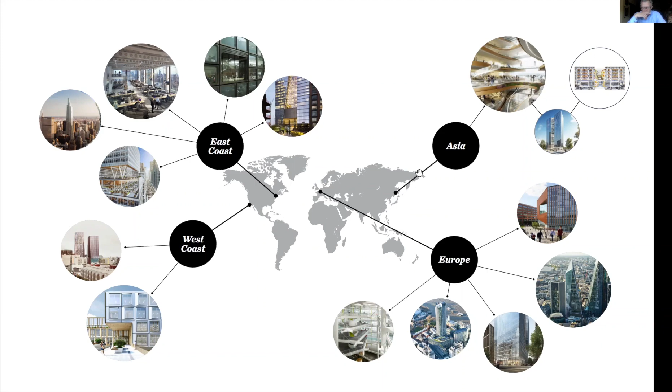Just very briefly, KPF has London and New York design offices, and we work very closely together. In terms of workplace, we are from London, working mainly in the UK, but also on the continent and in Asia. Our New York colleagues have an office also in San Francisco, so we cover tech people, Facebook, Google, etc., on the West Coast, the southern states, and tech companies and other companies in Asia. So we've got a really good sense of very rapidly changing trends at the moment.

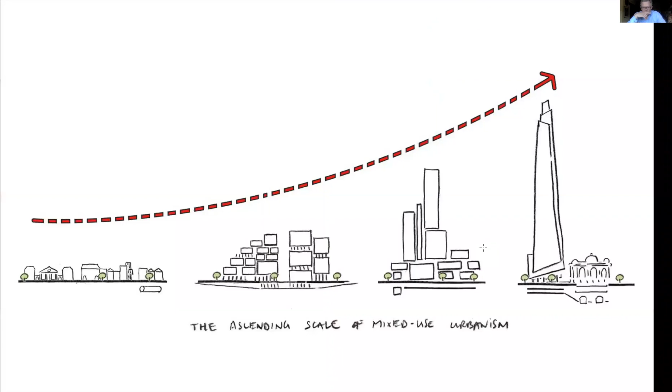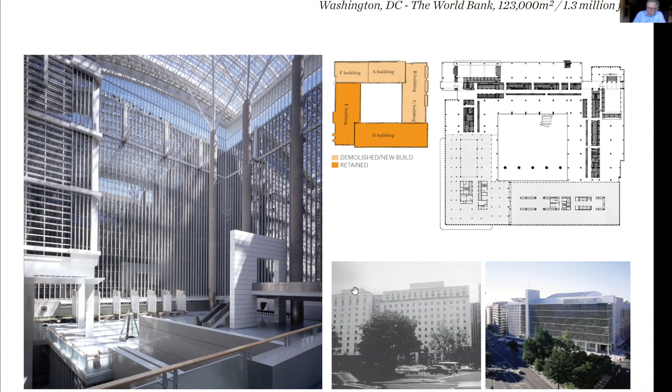To illustrate that, this is the World Bank in DC, which we did in the early 90s. We were the only architect to present a reuse scheme because in Washington DC there's a fix to the heights. This is very relevant to 81 Newgate Street because it's got quite a tight floor to floor. Through this, we learned all about how if you didn't have enough room for deep ducts horizontally, you made more zones. So from the beginning we knew that if, say, this is probably 3 tenancies, 3 zones, we actually have 6 zones in MEP. So all the horizontal ductwork is minimized and we have more risers. That was a helpful thing to start from the very beginning.

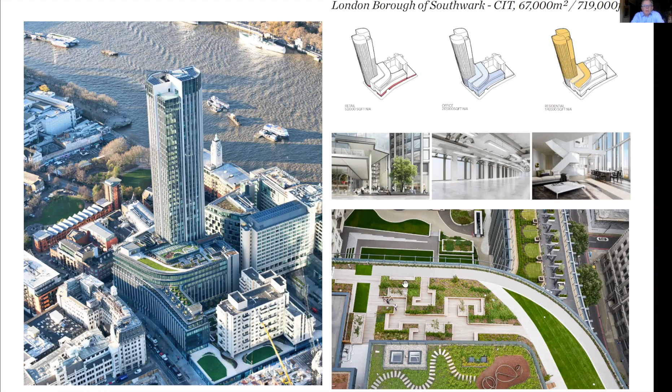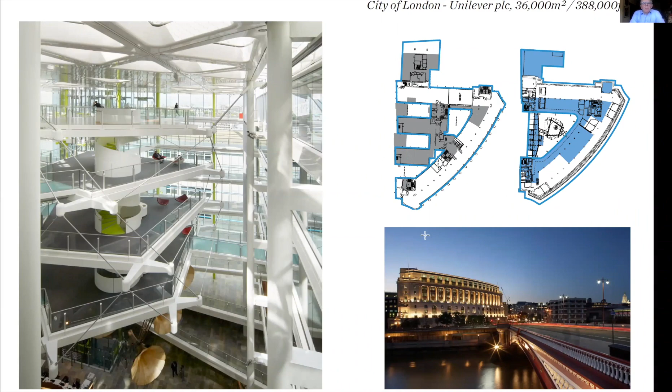In terms of children of the 70s and 80s, we like them a lot. This is South Bank Tower - the frames are extremely well built, and the concrete gets harder over time from when it's finished, so they're very robust buildings fundamentally to use. Unilever again is a kind of transformation where we try to reinvent what people might have done if they'd had more freedom at the time. And again, we're trying to make 81 Newgate Street a better version of what it actually was. So we quite like that era.

Just so you know, in Manhattan there are a huge number of transformation projects occurring at the moment, and we're doing a lot of them.

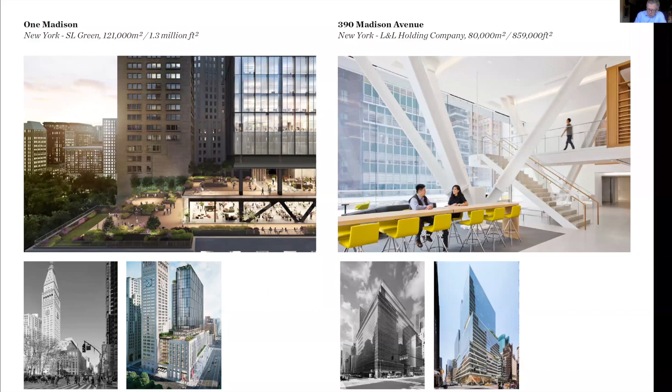Huge projects. The two biggest components, other than the obvious new systems and envelope, are interesting structural interventions to make buildings that typically have quite a tight floor-to-floor height have voids and volumes and special spaces, which we did at 81 Newgate Street. Key also is how you reposition the lobbies and the interaction of buildings that didn't have active ground floors with their urban block.

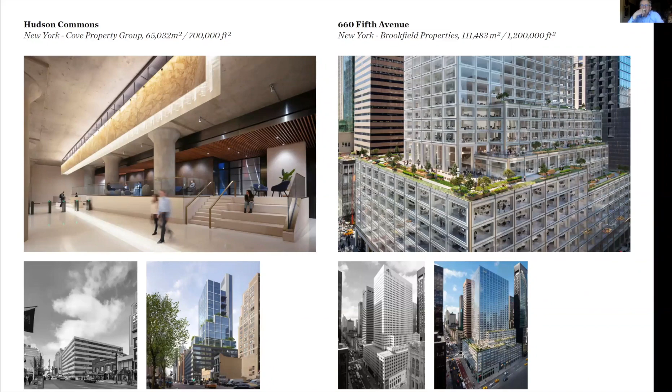On the right hand, 660 Fifth Avenue. There we discovered there's a very fragile slab edge, so we had to span column to column. Taking the aluminium out of the curtain wall system was hugely useful for the performance of the glazing, so we've got glass that's shaded, while cutting down the aluminium and the weaknesses in the curtain wall system as much as possible, or covering them.

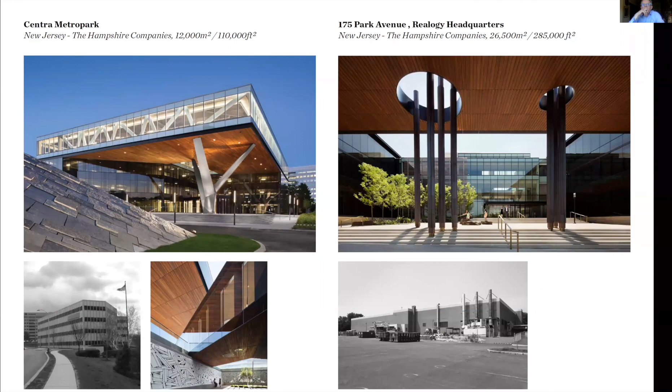Repositioning some of our own buildings as well, key is the lobby, and then a very workmanlike transformation of the buildings. Even in New Jersey, bottom left, a very unpromising start, another child of the 70s, and a shed on the right. So we really enjoy it - for us it's about imagination and coming up with something different.

This is very contextual for LA, but it's again a transformation. It was a shed, and this is now a car museum. Jean always jokes that if you look around at this junction, everything else is the same.

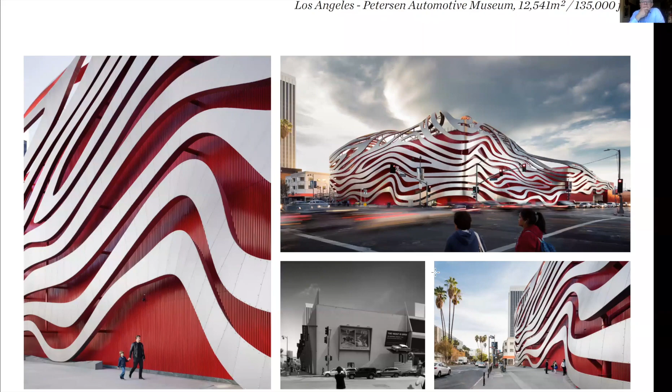We love roof gardens - I did my 5th year dissertation on roof gardens, and we always try to ban the MEP engineers from our roofs.

Thames Court, a little while ago now, was the first KPF project I worked on, but it did introduce us to the St. Paul's grid. There's not a millimetre of space - just a millimetre in this project - between the building and the St. Paul's grid, and that was a useful insight when we started this project.

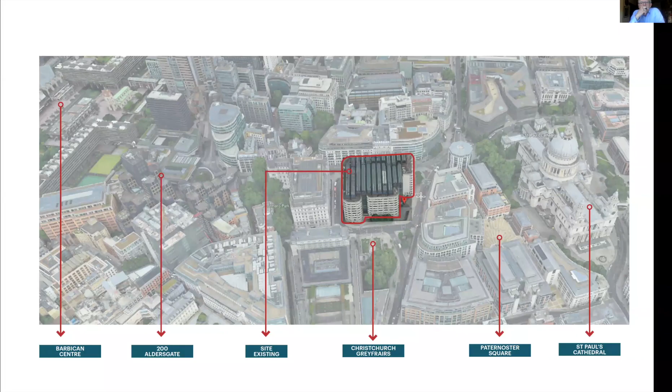So, interesting building - very robustly built, a very big lump. The idea is to really make it more open, internal to exterior, to make terraces, and to completely reduce its overbearing character while making a bigger building.

You can see here that we voluntarily took away some of the existing building. It was built by the PSA and did not comply with St. Paul's heights and grids. From the very beginning, when we were talking to Orion and Pella, we said we have to take some building away here before we can start figuring out what we do next.

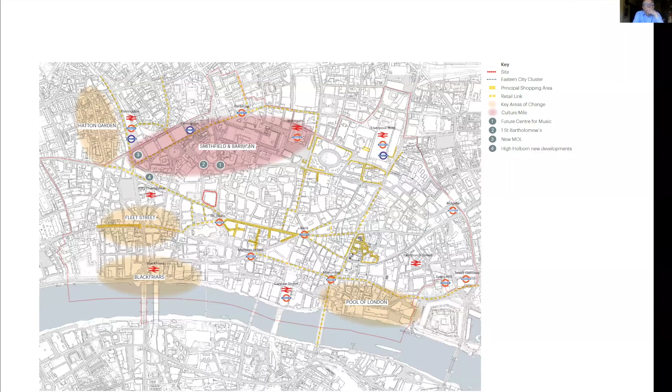That will be a good start also in discussions with the city, and effectively that's what we did. The building is a linchpin where at the moment it's totally closed off on a gyratory, yet it's just close to St. Paul's and to the cultural district, at the end of Cheapside. So the city wanted this building to completely transform too, and it began to get a list of all the things they wanted on the site - and we've been able to do all of those.

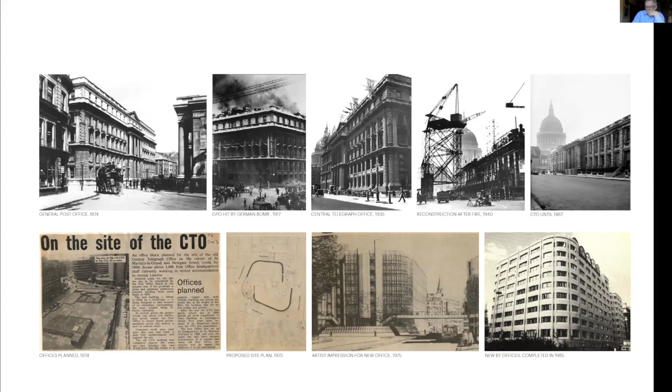So, GPO to BT, a slightly curious building. It had very, very large atriums in the middle, lots of basement space, lots of tunnels underneath it, so we didn't want to do very much in the basements at all. Nascently in the plan, you can see here a combination of atriums, but also slots or gaps to the outside.

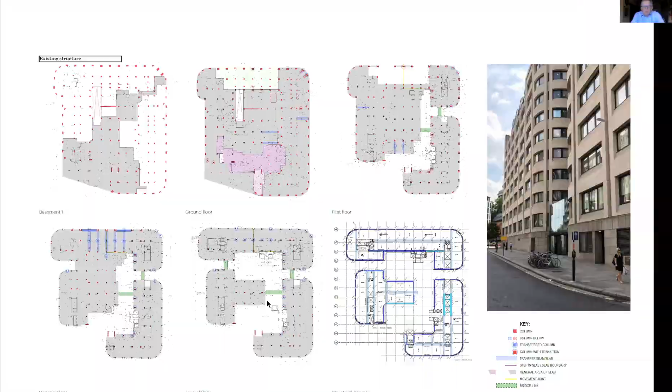Very lean in terms of being quite an efficient building - dispersed cores, lots of columns. So from the beginning we suggested it was a refurbishment. We didn't win the first round of bids on this, and it was when the new-build option fell away that the next set were actually on refurbishments.

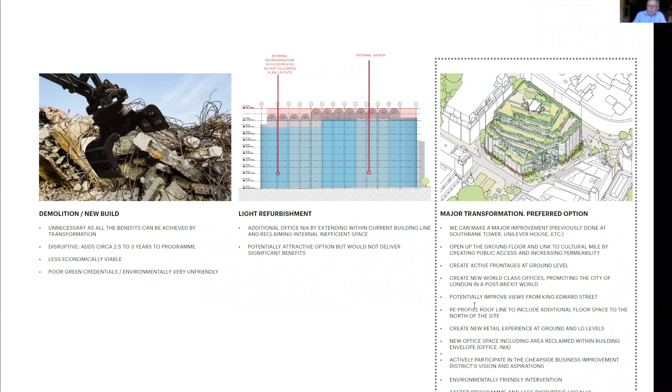We looked at a very basic one, or a transformational refurbishment. You can see from the very beginning, on the right-hand side, that we knew we wanted to take space away to make the building comply more with responding to its setting. Here, bottom right, you can see the St. Paul's grids going across the corner of the building.

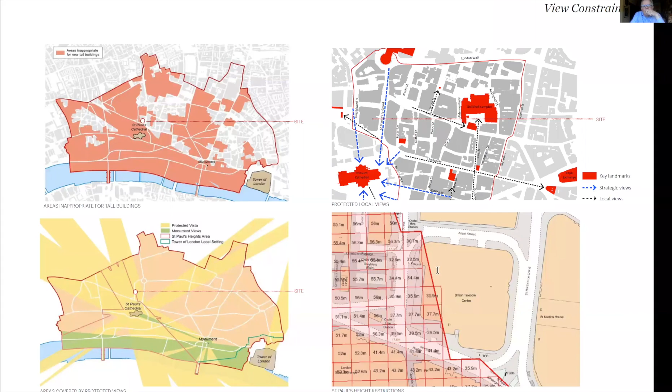Settings of St. Paul's, lots and lots of views - a very large number of view studies, and we do all of the first take of those ourselves. We have a full London model, etc. So the story evolved about how we could add area in some places, take it away in others, but really completely transform the character, the association and the image of the building from this very big, lumpy, quite bunker-like thing to something utterly different.

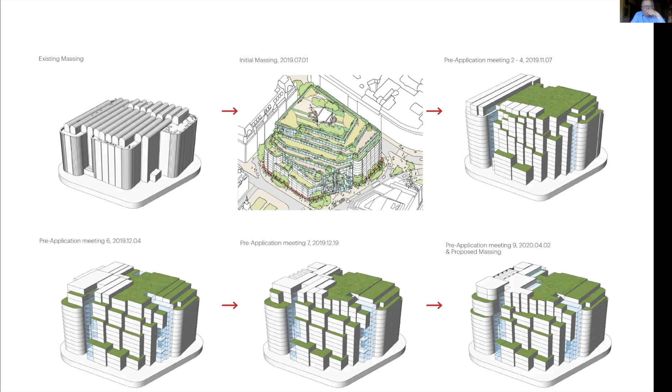And in taking away the western face of the building for views of St. Paul's...

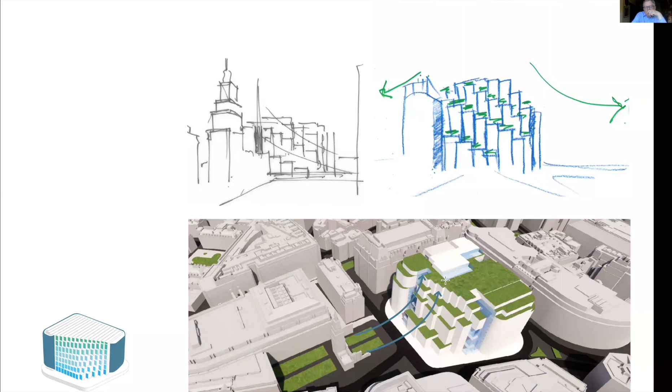St. Paul's allowed us to completely remodel the most visible and important facade in many ways. We began to look at how we could have lower, mid and bigger elements to really change the cliff-like nature of the building, to bring almost a story of the gardens of Christchurch to steps and terraces up our building and to a big roof garden at the top. The taking away of space and the ability to remodel just the front surfaces seemed to be a really good synergy and starting point.

We try and be very analytical, and this goes through a process of where are the cores, where are the holes. We have a few rules we've learned painfully over time, that you can't put new cores where there's current floor slabs - they have to be in the holes that exist at the moment. So we're very, very self-regulating and disciplined. But we've also learned that if you rely on old components, they quite often fail, or you find later that they're not quite as good as you thought they would. So for key systems like lifts, we provide new housing, new risers to reduce the effect of finding anything we didn't know at the beginning.

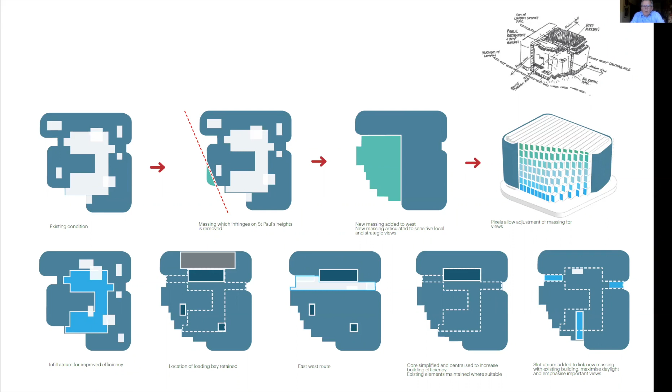And the bottom right is where we got to. So the beginnings of those indents become slots of atria that bring light in from the side. And the atria is infilled as a mixture of core and floor plate.

This looks in detail at how actually complying with the grid was not too painful. We did many, many views of this. You can see there's a dotted line here, which is a set out, which from the very furthest northern point of King Edward Street, there is no difference in how much we saw here or here because of the building that's just beyond us. And anything we added was outside of the St. Paul's policy area, and anything within that was either reduced exceedance or actually now compliance.

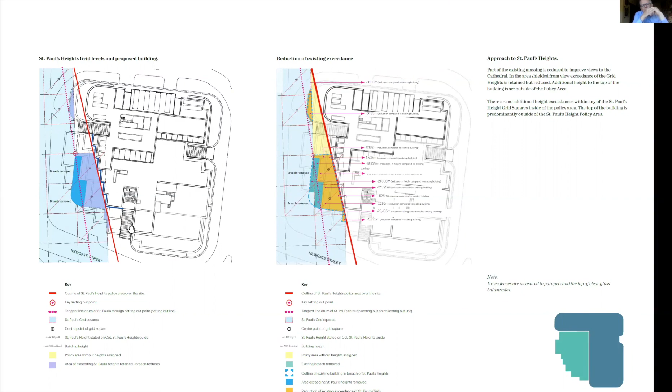So on the left-hand side you get a bunker-like thing. On the right-hand side, we changed to a double height reading to transform the scale. We removed the area in front of the red line inside the policy line. You can see it makes a really big difference to opening up a new vista of St. Paul's. And perhaps the space that we lost there, we added back on to the northern end of the site primarily, but stepped back so that it wasn't really very visible from any streetscape.

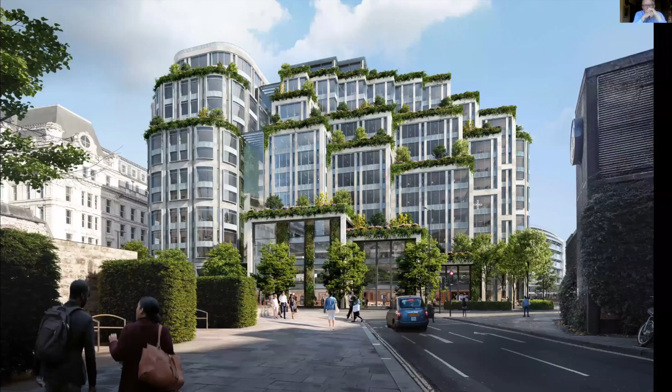So that is then where we get to the existing building and a modern interpretation, or something that looks very familiar to that, but allows us to create many terraces.

So we knew the city wanted a carbon agenda, and this is very good on that in both recycling embodied carbon and in emissions. A wellness agenda, so there are openable windows every 3 meters throughout the entire perimeter of this, and ventilation in the middle of the building.

Urban greening - we have very strong views on that. We believe that terraces are better than green walls, for lots of different reasons, but they're also an amenity for people who are in the building. They're easy to maintain and get at, and they can be substantive in terms of what is grown there. More importantly, in Singapore, which really encourages green, you can only put 10% of vertical greening into your calculations to comply with regulations. In Hong Kong and various other cities, it can only be within 10 meters of the ground plane, because they've learned there are lots of drawbacks to difficult-to-access, large vertical green walls.

So probably the only long debate we had with the planners was to stick to all horizontal surfaces, just a little bit around the base of the building, but transforming it, giving ourselves the rule that every floor should have some really nice terraces to get to.

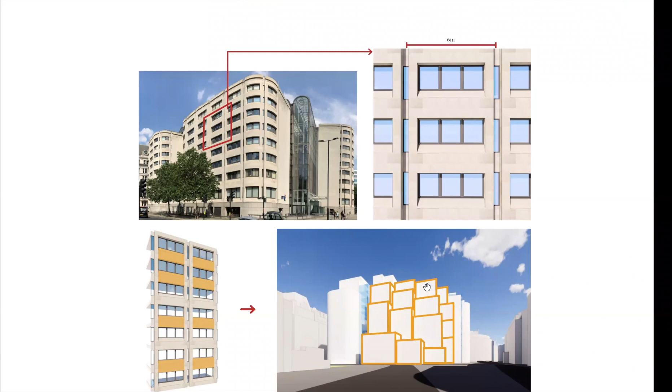We used the existing building as a quarry to put stone onto the new portions of the building. It allowed us to remove every other spandrel - we've practiced doing that, and it's in extremely good shape - and then add a terracotta spandrel in between, which we think is the least embodied carbon usage solid new material to put onto the building, transforming the openness of the building while not needing a single piece of new stone to be quarried for it, and also to make it still feel at home in its very close proximity to St. Paul's.

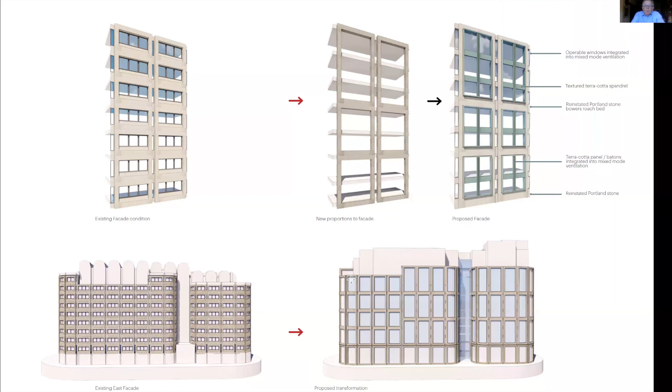From the left, quite closed, with the repetitiveness of every floor, to the right, opening up the module. It really helps adjust your sense of the scale of the building and open it up somewhat, sensitive to each elevation in terms of the exact amount of solid and shading, etc.

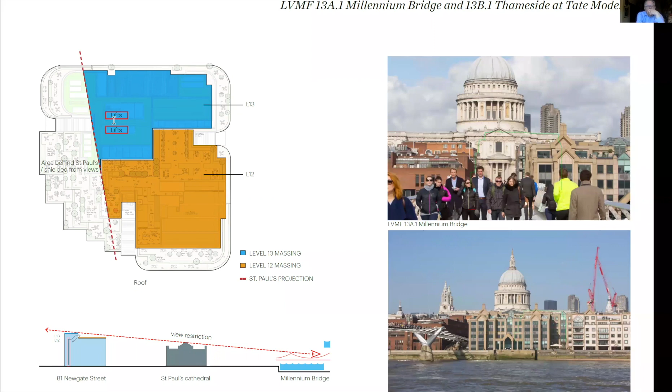There was, however, other than Townscape, a very hard stop, which is the Millennium Bridge view and all along the South Bank. So we tracked from Blackfriars Bridge to Southwark Bridge to make sure nothing was happening there. If you take the diagonal of the grid and also the Millennium Bridge plane, there are very few places where the core could go. So that more or less solved itself — where can we put the core that's still in an atrium and where the lift overruns don't create a problem from any views anywhere.

After having gone through that massing and architecture discussion with the city, their next big concerns were to make sure it worked very hard at the base and the top of the building. At the base, there are two diagrams in the city guidance of a cultural route — one is Tate to St. Paul's and then to the roundabout where the concert hall will be, and the other goes through to where the museum will be. It's hard to say which, or maybe they're both important.

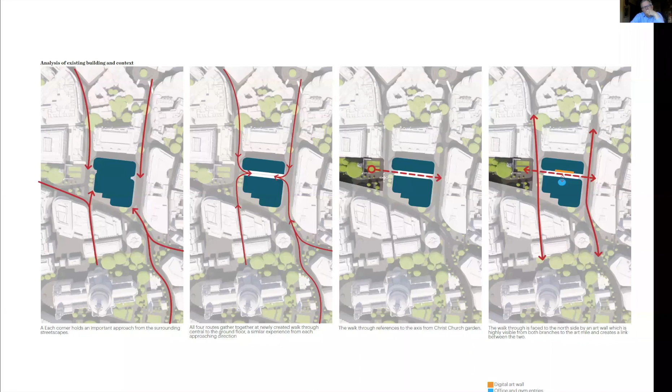In fact, the network is an idea we subscribe to. So we have a route through the middle of our building that connects these two, creates the destination, a spot to go to with an art installation, but also helps our building respond well to Christ Church and the gardens to the west, making an interesting link between those two routes. That becomes a public route and an arcade with retail along one side, the main entrance to the building, an art wall, and something open long hours.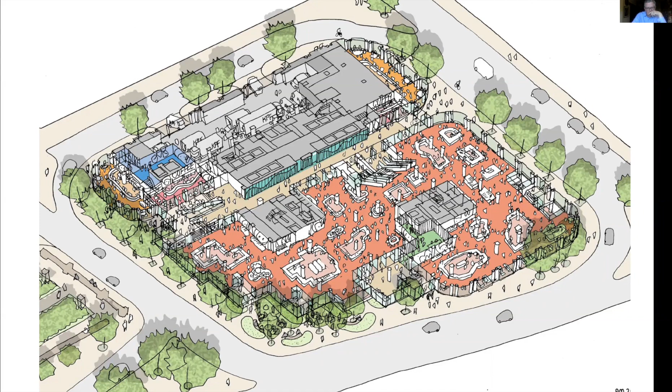There's a quirk of the site — the pavements don't align with the ground floor all the way around the perimeter. We could very gently ramp it down a few hundred mil so there are very clear ways to get into the building from the route through. We did many versions of this for the city, showing them how, if it wasn't one big unit, it could be subdivided into 2, 3, or 5. But here is the generous route through the building, and we'll curate a really interesting installation there.

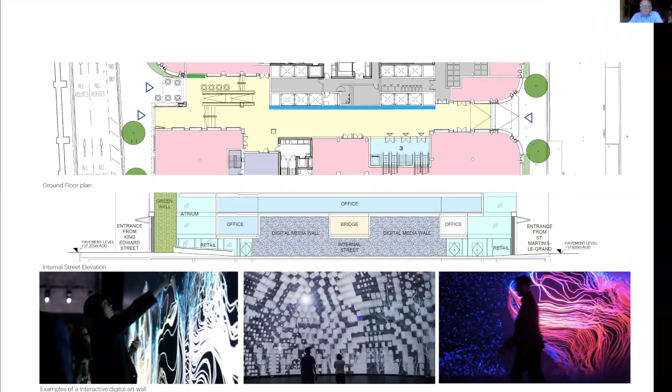We hope it's almost the place where there'll be events. We're hoping to get one big food offer, but that may change over time, and the city is very understanding of that. So as we cut a section east-west through the building, we have the route through, the entrance — part of the reason why that route was always busy — atriums that create more terrace space within the building, and stepping back away from the streetscape on all sides.

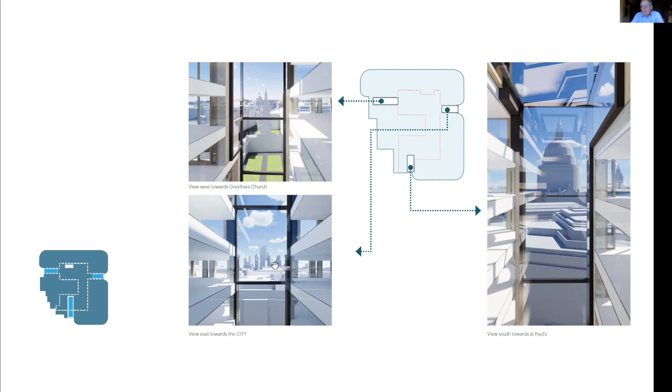The atriums work really beautifully to locate the office space. On the right-hand side, looking south to St. Paul's, you get that view from the first floor — you can just begin to see over the roof, an extremely good view. Then looking to the west, all the way through the atrium, which has an uneven stack, with terraces and an accessible terrace on every floor. And one looking directly at the center of the city cluster to the east.

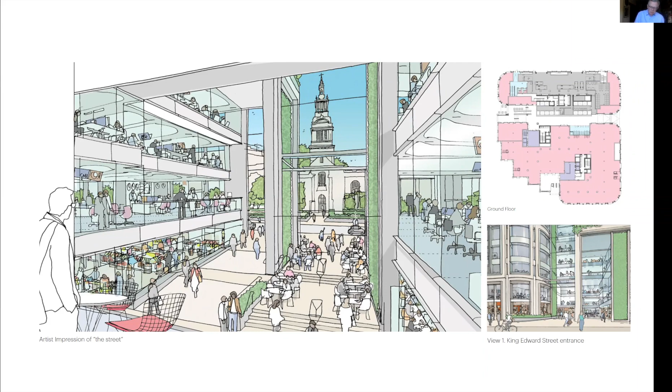So the outside comes into the building — the inside-outside links are very strong. There's some cafe spill-out space now where the steps are, creating a place one can dwell in, and a very active ground floor, meaning the office lobbies are lifted to the first floor. The escalators take you up, so the entire ground floor is about the place, which is the end of Cheapside. Our clients joined the Cheapside bid, and the office takes over from the first floor up. We're finding the same thing happening in many cities across the world, where the importance of informal space — space you can just pop to from your office — is valued.

This is north-south, so the loading bay is kept where it is. You can see that the core and various things are at the back of the building, at the north, and then a big roof garden.

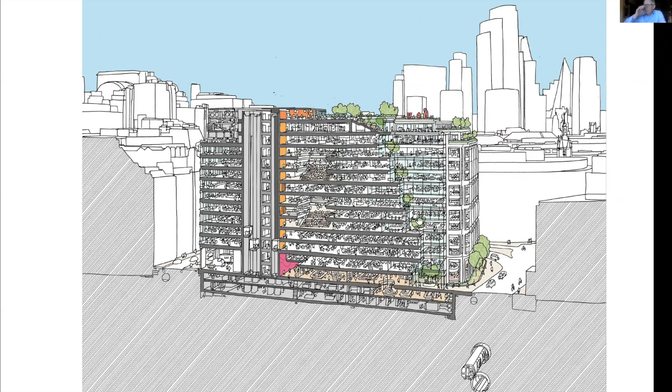And here's the atrium to the south, stepping back, with great views to St. Paul's. So to set up a beautiful roof garden, we stack all of the cooling over a number of floors, and we do this typically.

So at Unilever, all the chillers are stacked in one corner. South Bank Tower, or any project we do, we don't spread the plant out across the building. And that maximizes the roof for other things.

We did try and see whether we could paint those yellow and have expressed cooling towers. That was one step too far.

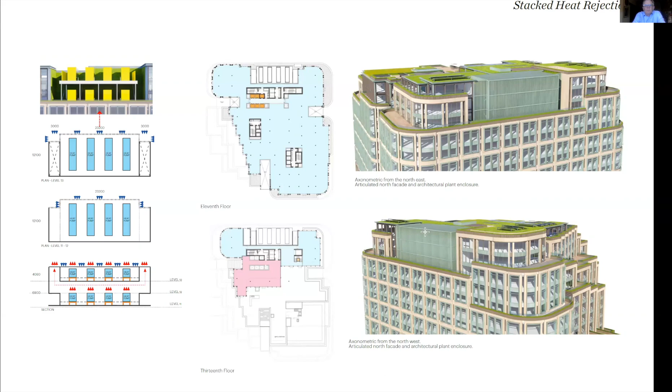But that sets up, and you can see the composition of the north just as discussed, a fantastic roof garden landscape with the whole of this publicly accessible. So not only is the base open, but the top is open too, and this helps us really respond to Alistair's agenda, every one of them.

Part of it is dedicated to the office here that looks towards the city, but this is all publicly accessible. The tenants have fantastic terraces in other places too, so there's lots of interaction for them. And there's a restaurant at the back here.

So we developed this in a very detailed way with Tom Stuart-Smith, and we wanted this to feel like a landscape that flowed. There is an entire area of biodiverse meadow, Tom calls it, here, so that we're not just terraces and places to sit.

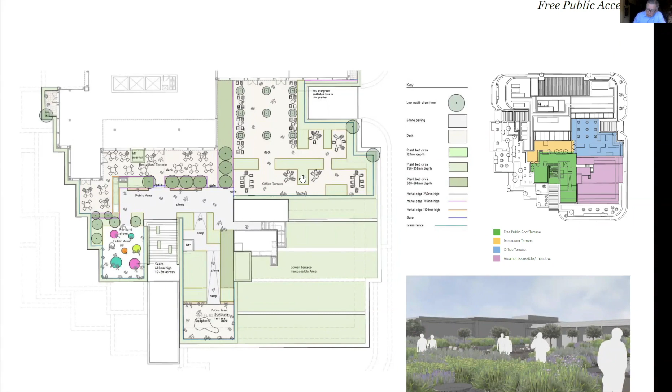The office here, people here. And even though the building is built in the 80s, it's essentially a 70s building, so we try to bring in not exactly Carlo Scarpa, but a kind of feel of a 70s landscape, with different levels, more intimate spaces, steps and changes that you could imagine being occupied.

So these informal steps have the most amazing view and access to St. Paul's. And this area here helps deal a little bit with the management of guests and people arriving. There's a lift here just to the side.

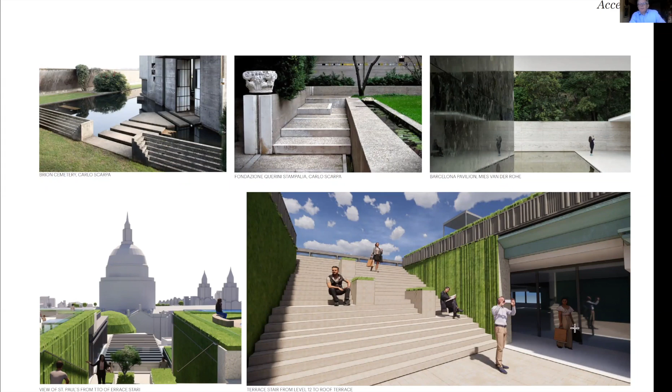So truly phenomenal views all the way around, with a good likelihood they'll all stay as they are. So the urban greening factor, again, a big priority. We got to 0.377.

I think the GLA are now encouraging 0.4, which I would see as quite a formidable challenge. But we have got to that, and real trees really help. So we've introduced a lot of trees around the perimeter of the building, which are part of a good diverse story.

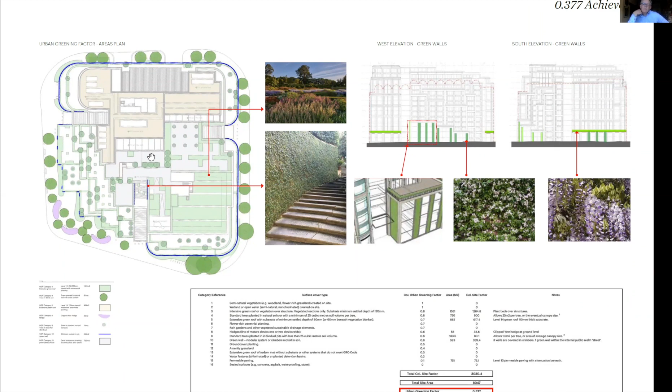Very carefully policed by the city about the depth and size of the planters, to make sure that they were very generous, with good scrutiny of the sizes and the types of things that could flourish there.

We've kept all of the basement, put as much plant as possible in there. There's a tiny extension to the basement just here, and that allows us to put a state-of-the-art swimming pool in for the office tenants and people on the lower level.

But we always try and put all the cycles as close to the underside of the ground floor as possible, with ramped access in here, so it's very clean. The cycles, showers and lockers are totally separate from the gym, so it's very robust in terms of tenants asking if things can be dedicated to them or not.

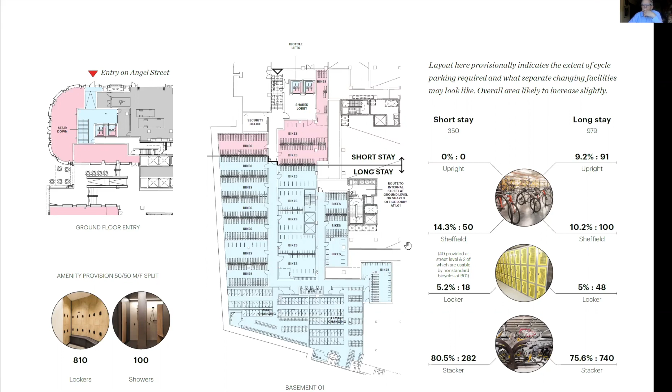We've had long discussions about where we are extending, what material we can use. The team on this, AKT, are doing the structures, Hilson Moran with MEP, and lots and lots of debate with Arup Fire, to make sure. We quite like a group of disparate people, because there's a lot of debate and self-correction that happens within the team in that way.

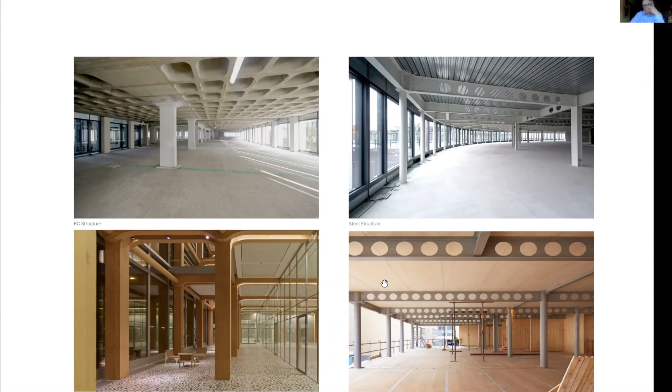We don't think we can do a timber extension to this. We were trying very hard to, but the size of the compartments, fire load, etc., was very difficult. So we're still searching for the best embodied carbon answer to that.

Giving the ground floor as retail use and retail at the top of the building, so there's quite a lot about making sure all of that's serviced with the proper riser requirements. A deep regret of mine is we didn't put enough retail risers in Mid-City Place, so there's not a pub there. We'll use the atriums as exhaust plenums where we need, although we're probably taking all the air down to get heat recovery in the base of the building, but that's work in progress.

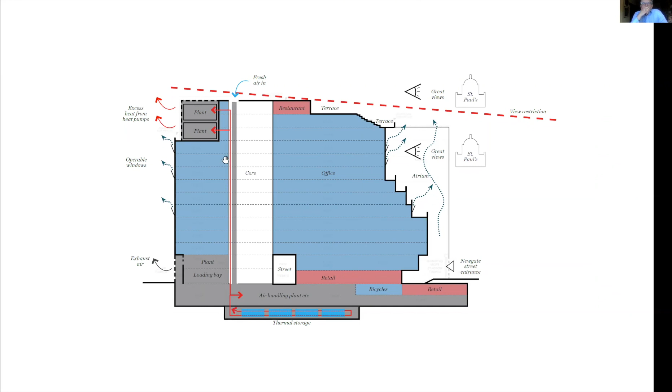Arif Langham from Orion used to be a structural engineer, and his very first take was that it's got too many columns. We spent a long time trying to find out how we can deal with that. On the Unilever project, we worked out that to change one column cost £1 million, so we never changed a single one. On this, it's slightly different — the too many columns is mostly where there are pairs of columns which anticipated a sort of space planning regime.

Albert from AKT has come up with a progressive idea where we put big plates on the soffits to carry the two above, put in one, go up, do the same. So we get to the point where we have a single column and a large plate where the pair used to be, all the way up the building in that one column line. We're leaving the rest alone. And clearly, when we put new cores in, we can enhance the rigidity of the building again. But the diagram on the left shows not that much in terms of taking structure out.

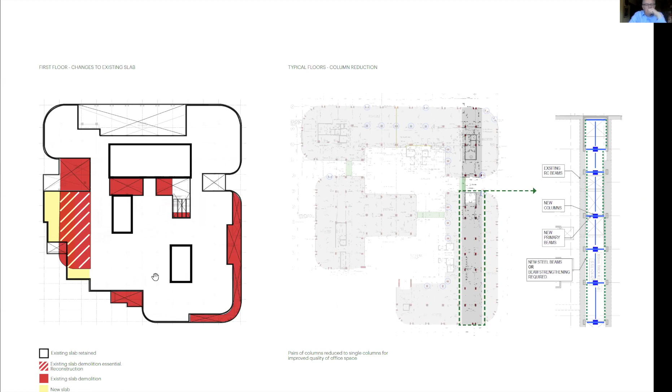We have made a kind of slot all the way around the ground floor to bring light in and to create a more interesting, generous ability to open up the ground floor.

So I should say we did this quite quickly. We started in September last year, and we got our approval in June. So this application was put together in remote working, and in fact the final meetings with the city, and all of the preparation of the report and the committee, were too.

So here, this just shows that the floor plates range in size. They're 40,000 plus at the bottom. They can be divided into three, but there's the loading bay at the bottom and the plant at the top. They have interruption to the north, and you can see the effect of the setting back for St Paul's Heights. So this was the scheme we submitted for planning and have approval.

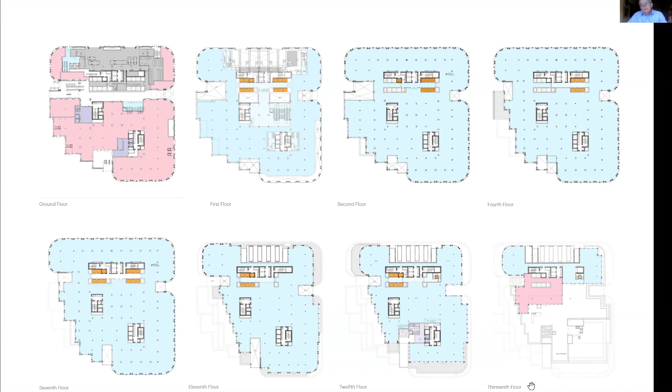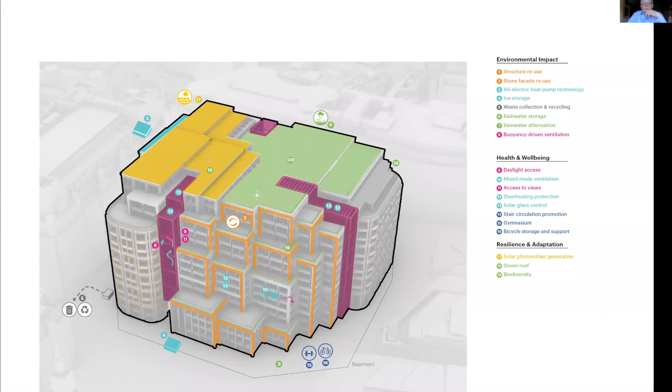We have a whole set of wellness and carbon agendas we can come back to. As submitted, we were just over 50% below the carbon emissions required by Part L, so healthily more than the 35% reduction that's required. However, that isn't strictly relevant because it's the operational carbon that's important. We've set ourselves a target of seeing how far we can get towards the Paris Agreement levels of operational carbon, and that starts to need further changes to systems, more reliance on the natural ventilation story, which we're working through at the moment.

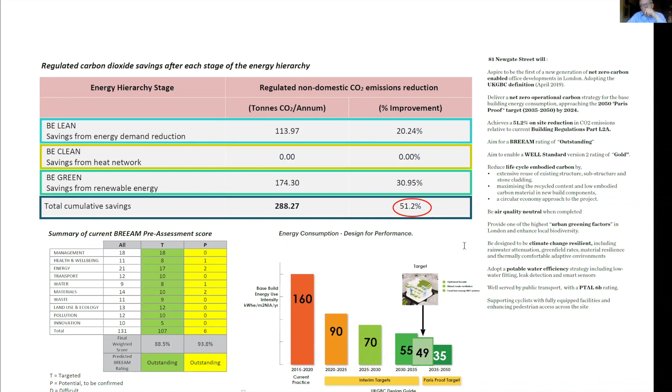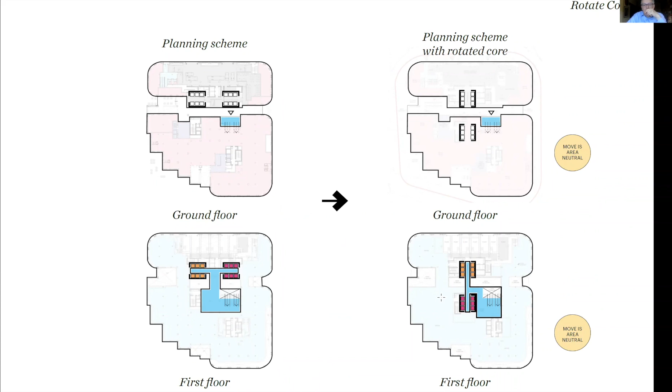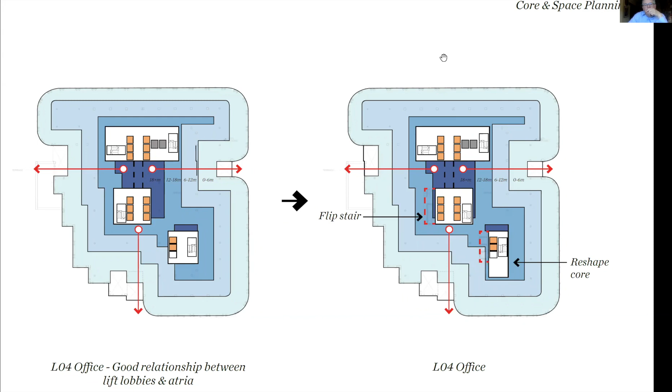As part of that, we're also rearranging the center of the building a little bit. We've rotated the core and looked more closely at that after fully understanding some aspects of the structure internally. That's allowed us to put the core almost in the perfect space for the deep space in the building. There's typically a nominal 13.5 core-to-wall distance here, a little bit more here, but you can see it's mainly a racetrack, and we're now just tweaking that interaction of the atrium slots to get to the point where we have the best amount of linear offices for tenants.

And just to end on what's next in terms of the wider context, we do know that the city has some aspirations to improve the public realm in this area because of the key connections from St Paul's to the museum and the concert hall.

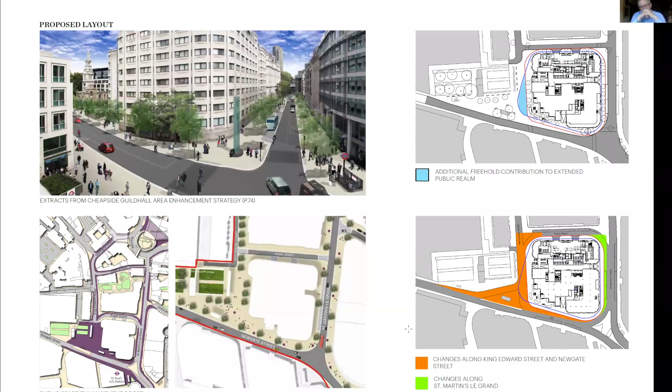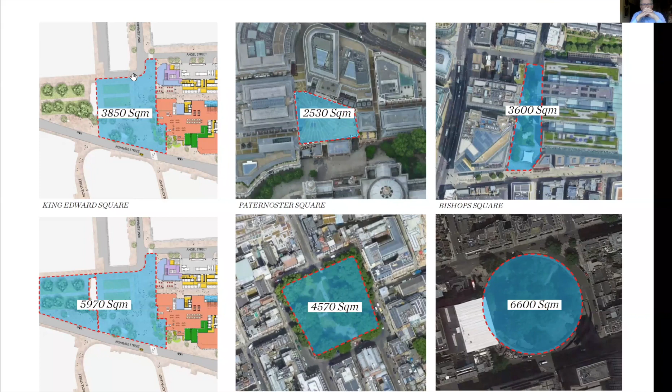Each part of the city may have different views on which is best. One option is to pedestrianise King Edward Street, which this illustrates. If that were the case, it would make an amazing new public space or square very close to St Paul's, who feel that as more and more buildings and offices come near them, their own churchyard gardens are at capacity. So we're hopeful this gets a good hearing as a beautiful space, larger than Paternoster Square. There's a quirk that the old GPO building's site ownership actually goes all the way across the road here, so Orion and Pella can be very helpful in making this happen in terms of ownership and doing the work, etc.

So we would love this to happen. There are some discussions, and this makes Cheapside Newgate a normal two-way road, and the new square. There are equally a lobby for what we believe St Martin's and for Angel Street want, and lots of different permutations. So we'll allow that to unfold.

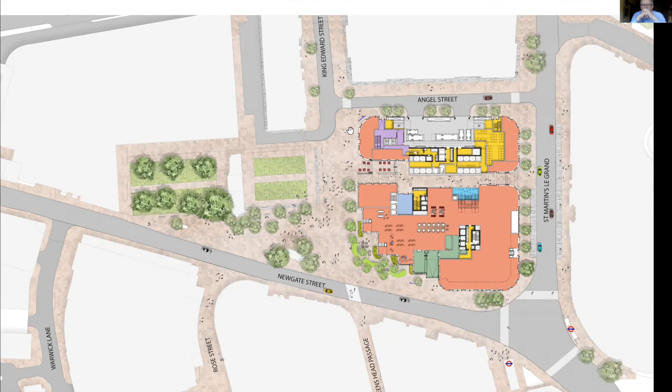Clearly, we have great Crossrail accessibility from the Barbican to the north in any case, so we're very aware that the St Paul's Tube Station one day will not be the only address.

So I suppose in summary, we hope that this is a really good example of how much one can transform a building to feel as new, to answer the city agenda of please be more inclusive at the base and the top of the building, have ambition about urban greening, have ambition about carbon, and we have had some really good tenant interest so far.

We were always very keen to make sure it looked good from the St Paul's Gallery and from many different angles, and I think this will be a really good new life for a building. It's been very satisfying to be able to keep more than the frame, but also some of the other more precious materials there. So hopefully that allows lots of time for questions.

Thank you, John. That was brilliant. I must remember not to use refurbishment, but transformation. It's fantastic. Yeah, first question, if I may.

You talked about the city's shopping list. Obviously, we know they're quite dictatorial at the best of times, but did you give them everything that was on their shopping list when you started, do you think? Without giving away any trade secrets?

Both Pella and Orion want to do the best reasonable building. So the stall was never set out to fight anything that the city felt was important, but just to make sure we were honing, negotiating, and making sure it was relevant to us too.